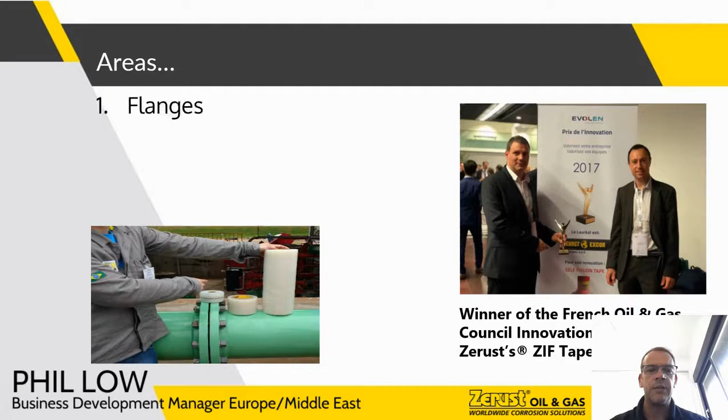So now looking at particular areas and scenarios around site and terminals. So we have flanges, CUI of course, scab repairs and coating defects.

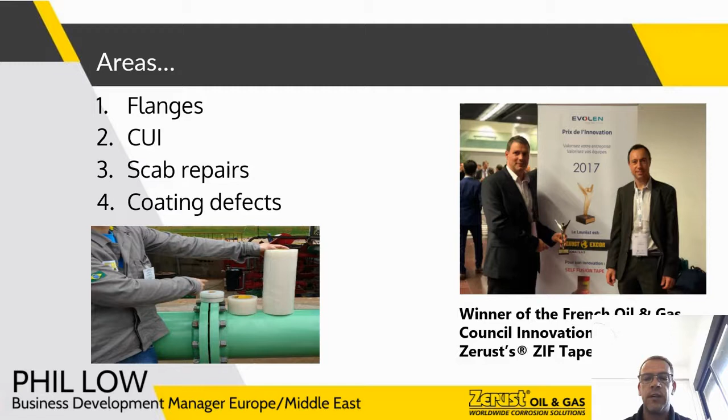It is also worth mentioning the tape did win a French Innovation of the Year award back in 2017.

Starting with flanges, very problematic, difficult geometries, difficult configurations, from fixed to gate valves, the nuts and the bolts, etc. I've actually run a campaign where we've purely focused on flanges, and I've seen coating breakdown after about 3 months, and this was using a very skilled crew and a 3-layer epoxy system. It's just the nut and the bolt, especially when you blast in SA2.5, it just simply doesn't have enough key.

To provide long-term protection. So what we look at is, in terms of flange application, we will address the nuts and the bolts and any kind of loose crumb corrosion. We can use an alkaline wash, alkaline rinse, or we can use in combination with a rust remover or rust converter, if you like, to dress the area. And that would then prep the area ready for the ZIF tape application.

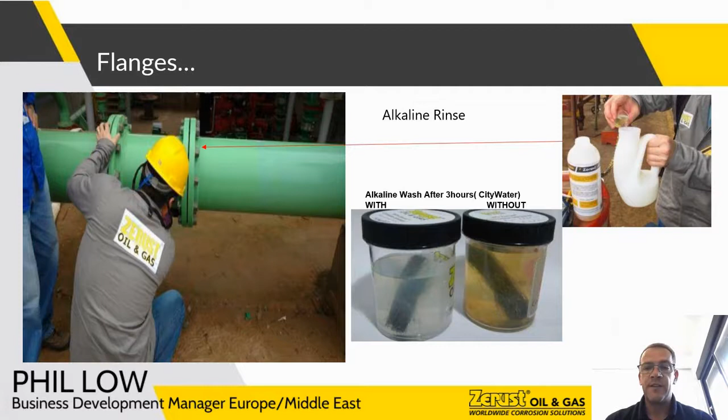So just a few examples of flanges both on and offshore, different configurations. I'll just pull up the pointer here so you can see the corrosion coupon left exposed, sitting in the environment, and then the protected one still spotless underneath.

The flanges do take a little bit more skill and experience in terms of the application, of course, compared to say a straight line pipe, but still fairly easy to apply out in the field.

A question I'm commonly asked is, in encapsulation, what if there's a gas leak or release? So you can just put a score in, let's say, the 6 o'clock position. That would allow for any gas or H2S release to be picked up on the gas monitor. So it's not a problem.

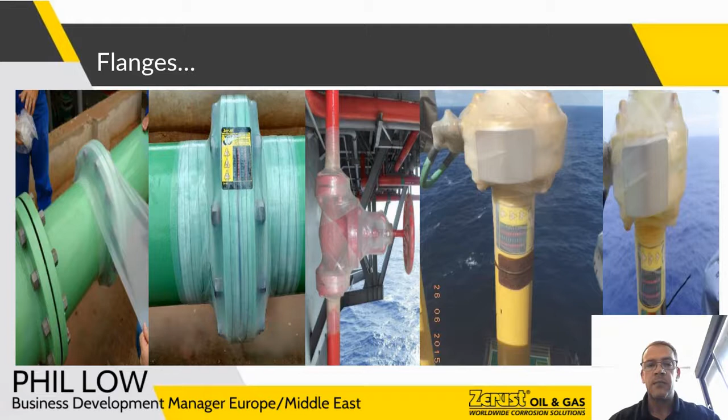And this should give you ease of application and full encapsulation, because the chemical properties will then protect all the difficult geometries in commonly found flanges.

So moving on to CUI and scab repairs, and I'll give you some examples of how this looks. We worked with a couple of clients in Central Europe, a terminal and a refinery located right next to the sea, the North Sea, so quite an extreme environment. It's also worth noting there was a huge salt mountain just beside these trials, so yeah, the chloride level was fairly high.

So what we did is, for this particular client, we worked with their inspection team. We took some NDT areas, as you can kind of make out here. So we scraped back a few areas. You can just make that out here, and there were a few others around the pipe as well.

So as I mentioned, we scraped back to bare metal. We took the NDT readings of the pipe thickness, and then we just wrapped some areas, straights, bends, etc., different locations, in a protected versus not protected scenario. The lines were operating at around 110 degrees Celsius, so fairly at the higher end for CUI.

They were indeed actually CUI lines, but the coating or the insulation had been removed. What I like about this is, not only can you see, this was 14 months, not only can you see it's spotless, but even where the tape had been, you can see the difference between the protected versus not, and that was obviously the exposed scrape back area, exposed to the atmospheric environment.

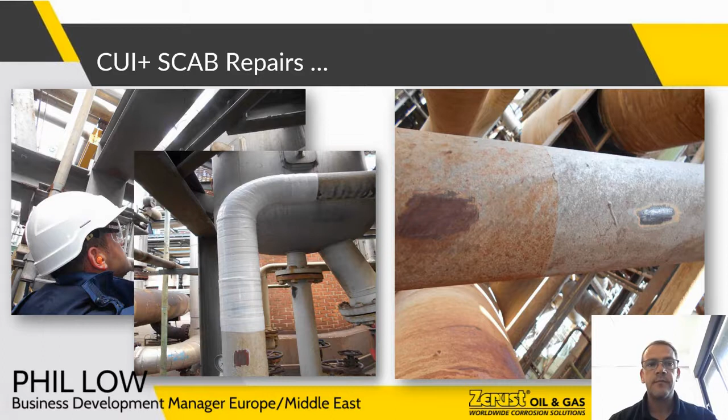So again, these examples are coming from Central Europe, coastal, as coastal as it can get. As I mentioned previously, the removal of the tape - this coupon that I'm pointing at now was left under the tape. This trial was about 7 months in terms of longevity, and when I scored back this tape, the coupon is absolutely spotless.

In terms of trials go, I don't think it gets any better, and this is the one we just left sitting out in the environment. Again, coastal location, different line, coupon placed underneath the tape, corrosion coupon, line itself wrapped. The control coupon was just sitting here. This coupon is all but spotless again upon removal, and this one actually started crumbling in my hand when we went to take it off. So just another example where the ZIF tape, in terms of proving its effectiveness, has done a really great job.

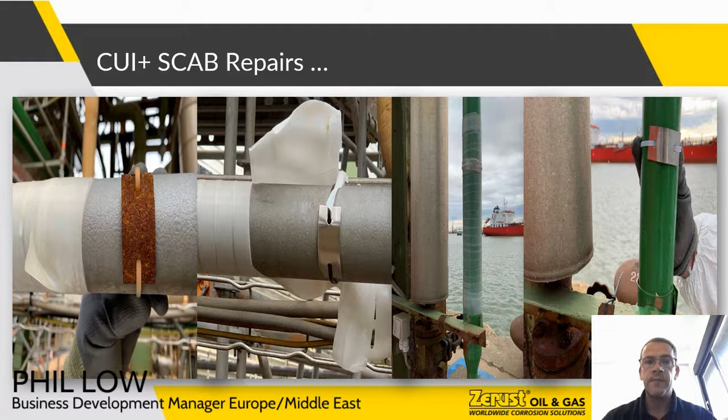Just to kind of close it out, we have some examples where on an FPSO, some flange remediation work - I covered the inspection and how I see it being used in an easy manner for scab repairs or remedial repairs.

So if you are experienced with high level work, you can essentially send the rope access guy up, do an on the spot kind of repair and fix. It's going to give you longevity for 5 to 10 years without any problem, and you can just move on to the next area. So from my side, I certainly see the tape playing a big part in fabric maintenance related projects.

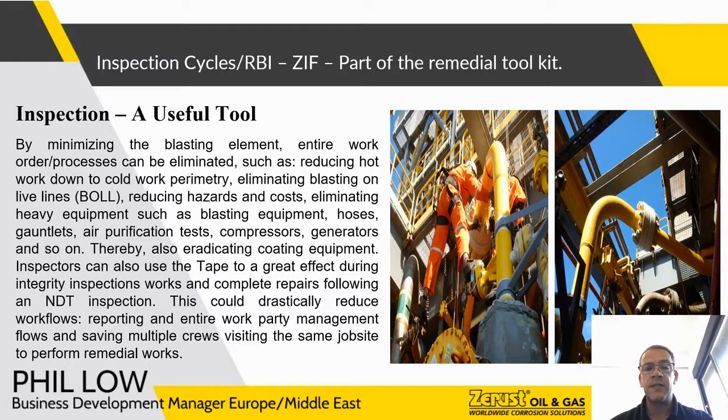The tape itself has a really good temperature range, so we're looking at minus 45 up to about 220, 230 degrees. But what we tried to achieve by pushing it to 175 - as I mentioned previously, the bulk of the CUI kind of problems is around 85, 90 degrees - we just wanted to push it that bit further to ensure the tape could cope under the extremes.

The test was run for about 15 cycles in total over a 6-week period, and it was basically taken up to the hot 175 degrees and then letting it cool down over the weekends, just to reach an ambient level. At the end of the test, there were no defects found in the tape itself, and it was certainly from my side - because you don't know with these things how they're going to go - I was very pleased to see the results of an almost perfect test.